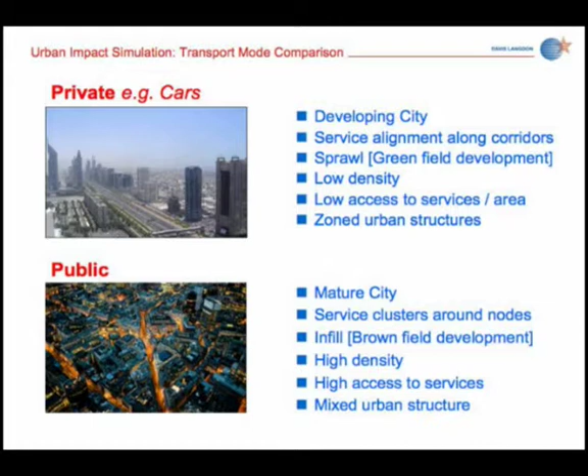Patterns of density play a large part in defining our cities, i.e. the location and the height of buildings. And we've seen examples this morning of very different situations where we have established as opposed to emerging or re-emerging cities. And just taking the transport aspect of infrastructure alone, we can see very different scenarios here. The first where growth is very much related to private, i.e. car transportation, and all that implies. And the second where the growth of the city is served by and reliant upon public transportation.

London is a great example of that, but anyone who's been to London recently will see that it's creaking. It needs a lot of investment in its infrastructure just to support its existing living and working population, never mind the projected figures. Thank you.

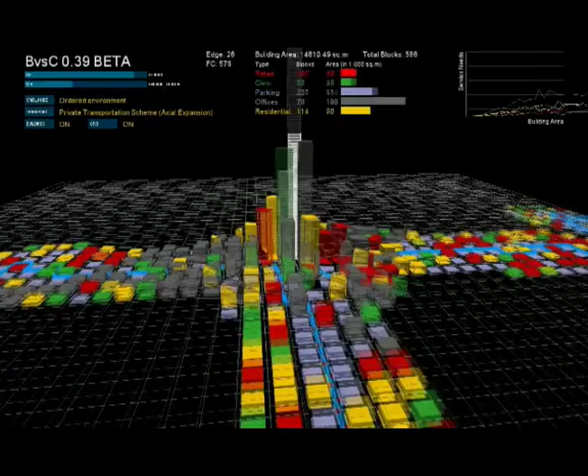Our good friends at Aedas have created this model that simulates how a city might grow around a central office tower, and this first scenario shows growth along car routes. So you can see the routes in blue and how that growth is linear along those main arteries. And you can see examples of that in some North American cities, and arguably here in Dubai too, with linear development, albeit high-rise, along Sheikh Zayed Road.

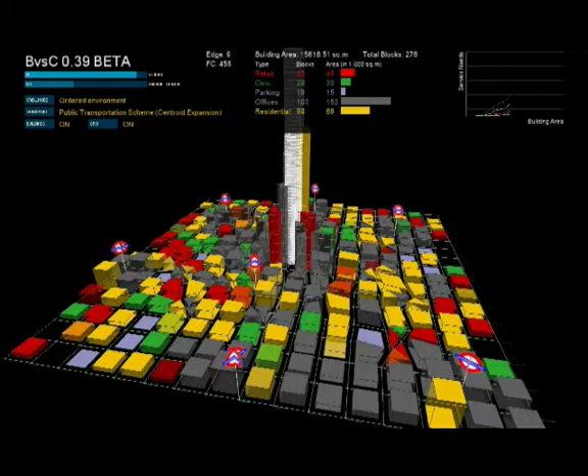This second scenario demonstrates the alternative growth pattern, which is that related to public transport. And that could relate to a more mature city like London, for example. And here the growth is much more organic. The spaces within a more central hub are filled in before horizontal sprawl takes place.

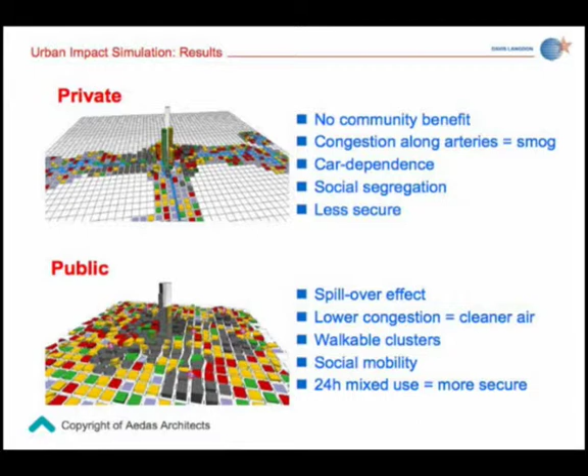And in a way, those simulations sort of show how a tower development requires and stimulates services, whether they be public or private transport, or a mix of other uses, for example, leisure facilities or residential spaces. And really, they serve to prompt questions about the sustainability of a building, in particular a tall building, and more particularly the city in which it's located, on issues such as the efficiency of infrastructure, on congestion, on diversity of use, and so on.

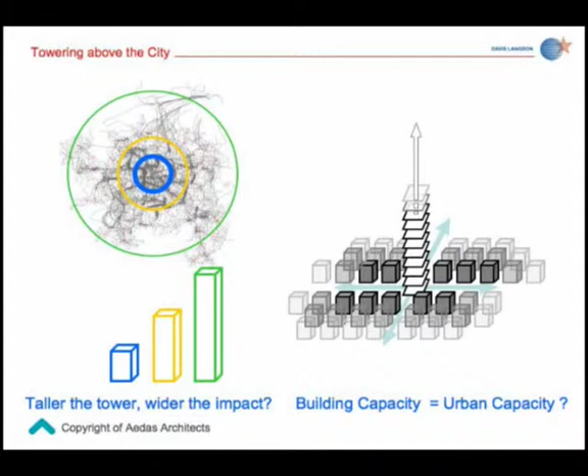And the point is, I'm not a transport engineer, nor am I a city planner, but what I'm hoping to introduce here is the idea that the sustainability of a tall building is related just as much to its environment as it is to the building itself. The tower and the city support each other, and through that relationship and the tower's ability to take advantage of existing and developing infrastructure, it reaches far beyond its envelope.

And that profit perspective means that, to a large degree, we pay lip service to issues such as life cycle cost, to business efficiency, to a whole host of other things. And what it does require is an appreciation of capital cost drivers and the usual and more traditional QS metrics of wall to floor and net to gross ratios, of the weight of the structural frame, and our favourite bottom line, the cost per square metre of the shell and core building.

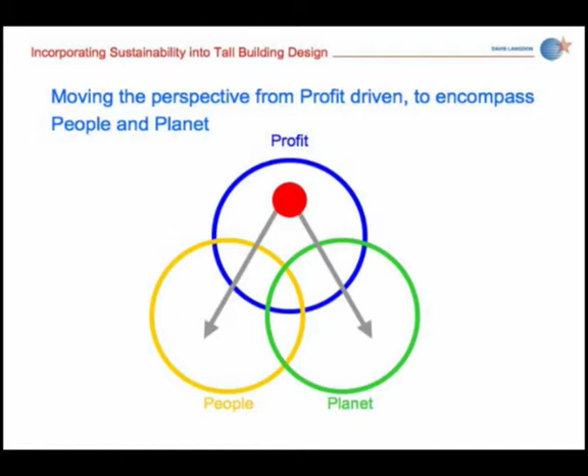So, the first point to emphasise is that we need somehow to move that perspective from the profit circle to embrace the social and environmental circles too. And as I said earlier, life cycle costs, energy usage, business efficiency, as Alastair mentioned earlier, if you take the total cost to a business of occupying a building over its lifetime, 85% of that is staff related. And what about infrastructure too?

The current driver is very much legislation, and that's backed by international and national policies, which then filter down into local guidelines and regulation. And there's a whole host of them. In the UK alone, we have the Building Research Establishment Environmental Assessment Method, BREEAM. We have Part L of the building regulations. We have codes for eco homes. We have landfill directives. We have a whole host of directives, and it's a bit confusing.

Sorry, I'll just go back to that.

So, although the stick is very much legislation, it's a bit of a soft stick, and we can't really fault the policymakers for that because no one really has a coherent framework with which to assess sustainability.

If we just go back to the triple bottom line and how we might integrate that into the various stages of a construction and asset life cycle, what really needs to happen is that those circles embrace the whole building life, starting with the energy used to actually manufacture the components that fit into the building from the outset, the embodied energy, to how that building might be reused in 50 or 60 years' time. And we'll see later the impact that can have. So somehow that all needs to be unified.

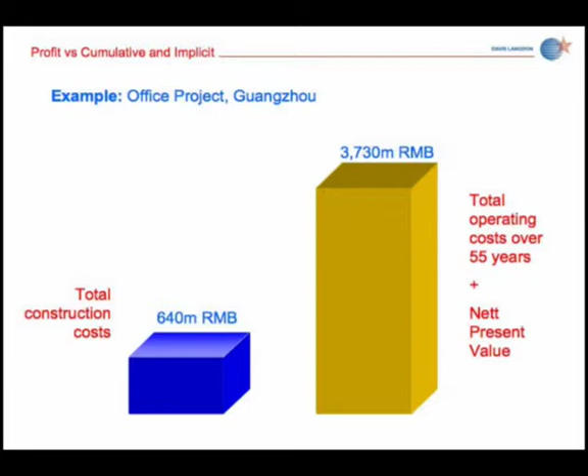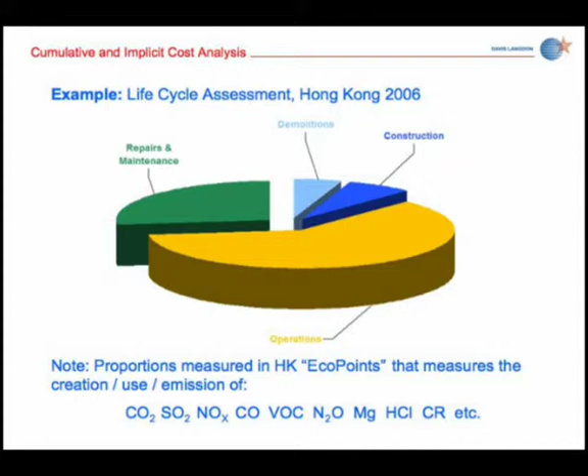That was costs. This is environmental impact. This is another study that we helped the University of Hong Kong with a year or so ago. It covered a range of buildings, and one of which was this office tower that this pie chart represents. It created an environmental impact unit of measurement called a Hong Kong Eco Point, which covered a whole range of impacts from climate change, acid rain, photochemical smog, and so on.

And for me, the important message from this pie chart is the relative insignificance of construction in environmental impact, and the absolute significance of operations and repairs and maintenance. If you take that green and those yellow pies together, that's almost 80% of the total environmental impact of the building over its lifetime.

You say quantity surveyors can't do graphics.

My favourite paradox is actually one that we looked at last year, and it was a study carried out by an American company on the green credentials of the automotive industry, and it was gleefully picked up by a UK motoring magazine, which showed what happens if you actually assessed cars in terms of sustainability and looked at their whole life cycle from design, manufacture to operations, and importantly, recycling.

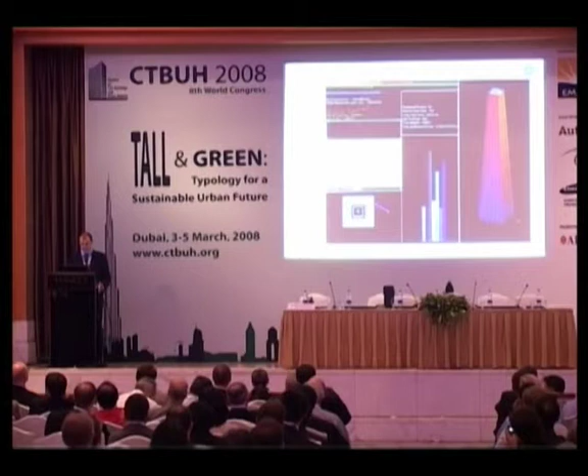We're also interested to know how all of those factors might be impacted by shape and size of floor plate, and whether tapering a building has any significant impacts across all of those issues. Again, just looking at alternative shapes, whether it's circular or oval, what impact does that have on the various capital cost elements, and also energy usage?

One that tends to characterise a traditional tension between architects and QSs or developers is floor-to-floor heights, and often developers try to squeeze that sandwich so that they can accommodate more net floor area into a building. But do we properly analyse it when we take that decision? Do we look at the impacts on the environmental strategy of the building?

Facades, an absolute key cost driver in towers and a critical part of environmental strategy. Would it be worth investing more in methods to overcome solar gain in order to reduce energy costs? These are the sorts of things that we're just starting to look at, and we're in the process now of strengthening and checking the data inputs, but also questioning some of the key relationships which are being shown.

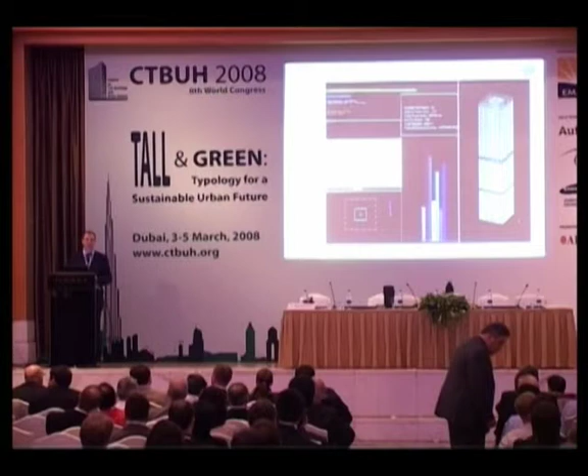As we heard this morning, oil is currently over $100 a barrel. If it became $200 a barrel, what would that do to the energy cost of a tall building? And, importantly, what effect would that have on renewable technologies, which also take energy to manufacture them?

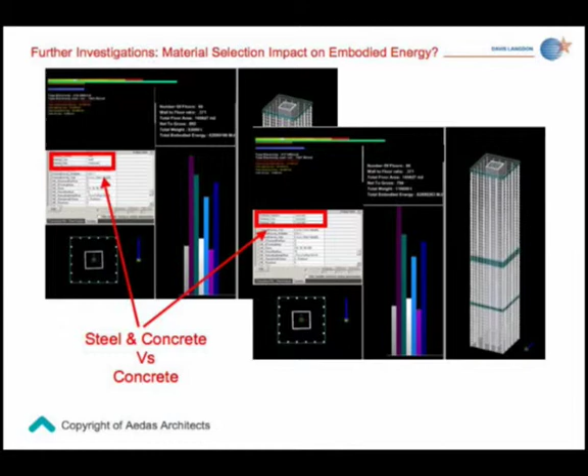There's a whole series of cost-benefit analysis that we need to undertake, and we actually can do it. One of the barriers at the moment is just a lack of information, or a bit of inertia in actually going out and grabbing that information. But if we had a model and a framework which we can actually see works and we can actually test these relationships, then that would encourage us all to actually go and get that information.

And that lack of information is one of the reasons why a lot of people quote the vicious cycle of inertia as being the status quo at the moment. Again, just going back to the point about legislation, if we had a framework that would make it clearer, that would actually remove some of the confusion and give a longer and wider view and show just how the impact of a tall building, for example, isn't just about the building. It isn't about putting more steel, which creates more embodied energy. It's about the wider impacts of the way it sits in its environment.

And actually, I was told just 2 days ago that a recent study by the US Green Building Council showed that, on average nationally, for a US office building, there is almost 2.5 times more energy used in its workers commuting to and from that building than there is in the actual operation of the building itself.

I hope I haven't given any answers. I understand that.

The bottom line for me is, if someone came to me now and said, how much do we have to pay to create an eco tower, a green tower? I would say, I don't know, because I don't actually know what a green tower is. I can tell you how much you'd have to pay to go from very good to excellent in a BREEAM rating, or from silver to gold in LEED, but does that actually represent a green building?